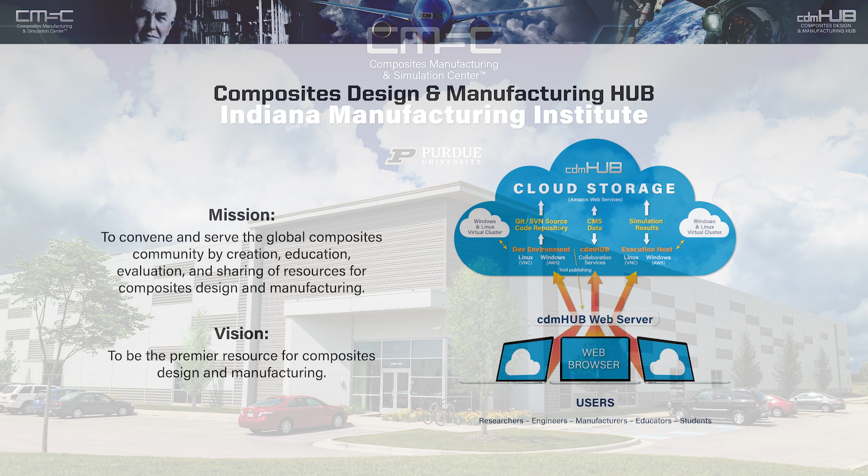We launched the CDM Hub in 2013 with the mission to convene and serve the global composite community by creation, education, evaluation, and sharing of resources for composite design and manufacturing.

CDM Hub provides a very powerful website called cdmhub.org for the composite community to carry out this mission together. We envision CDM Hub to become the premier resource for composite design and manufacturing in the near future.

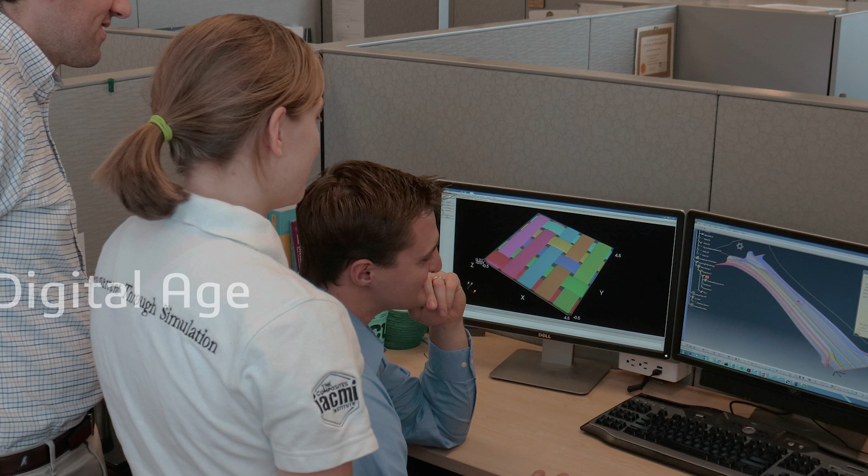The Dassault Systems 3D Experience Education Center of Excellence in Advanced Composites is the result of a 7-year partnership between Purdue University and Dassault Systems. It is expected that this new level of engagement will bring significant benefits to the two partners and to the global society as we work together to bring the advantages of the digital age to society. Together, we will advance the digital enterprise by developing the human talent essential to this new paradigm and by utilizing the 3D Experience platform to exercise digital twins of complex composites manufacturing and performance to demonstrate the power for simulation of phenomena that are understood today only by empirical experiences. We will work together to introduce those concepts to a wide range of industries within the advanced composites community, from the original equipment manufacturers to the supply chain industries.

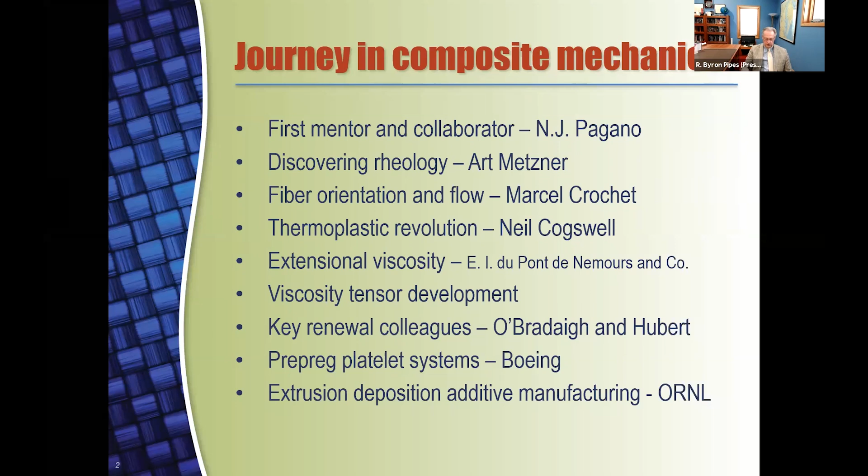The first work in my introduction to composites began quite early. In 1969, I joined a company which is today Lockheed in Fort Worth, Texas, and I was challenged by my boss at that time, Dr. Jim Ashton, to solve this free edge problem that had been discussed because people were depending entirely upon laminated plate theory for much of our early work. It had just recently been developed and adopted to composite materials, and while laminate theory did provide an excellent platform to understand these anisotropic materials, it failed to explain what happened at the free edge.

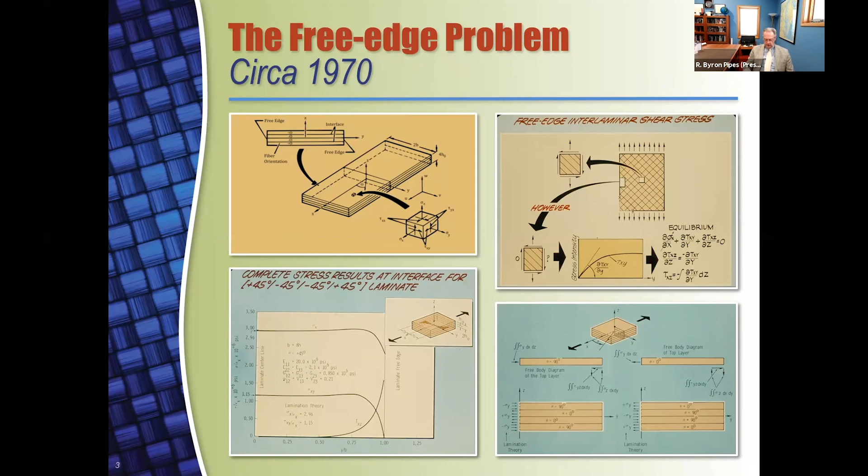This free edge challenge had been offered up by the U.S. Air Force, and there was a gentleman there by the name of Nicholas Pagano, who also was working on this problem, and I was sent to meet him and talk to him at that time. He and I met, we became collaborators, then he became my mentor, and the work that we published together in this area certainly launched my career.

The interesting thing that happened is that Nick continued to follow this problem for another decade and developed the extraordinary understanding that we have today in terms of how stress transfer occurs at a discontinuity such as a free edge. He published much of this work in a book edited by J.N. Reddy, and I recommend it highly to you all. At the very bottom of the page is the first archival article that Nick and I published together. Without Nick, I certainly would not be where I sit today.

This work was continued here at Purdue some years later by Jonathan Goodsell. We had solved only the tension, extensional deformation problem. We had not solved bending, we had not solved thermal expansion, and we had not solved twisting. In many ways, Jonathan put the finishing touches on this work. The complete family of solutions is now available in a publication by Jonathan in 2016.

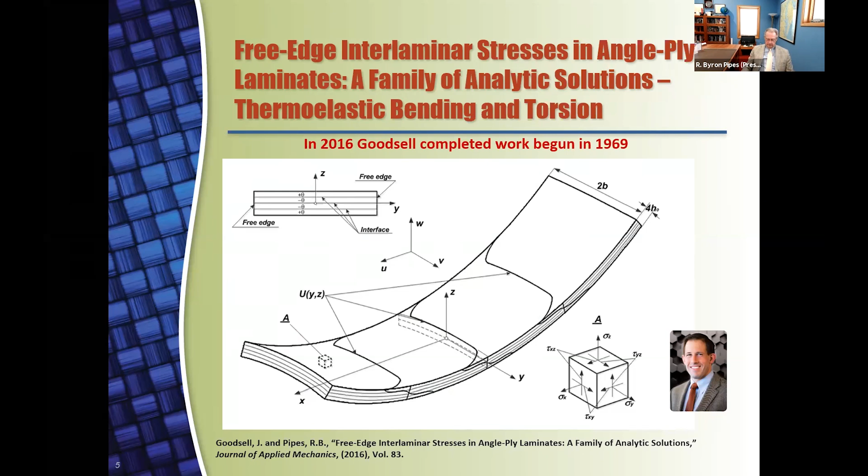The first real mentor I had after I joined the academic world was Arthur B. Metzner. It turns out that Arthur, better known as Art, well known in the field of rheology, was an extraordinary faculty member. He, in many ways, set the example of what the modern faculty member should be, a scholar, yet with one foot in industry, trying to understand what are the issues that are barriers to technology development. Art was a master at this. He also led one of the top-ranked chemical engineering departments in the country at that time at the University of Delaware.

He and I became friends, which was a big surprise to me. In many ways, he chose to be my mentor, and I have to tell you, it was a wonderful lucky break for me. As I looked at his career and modeled my own after it, to be fair, I found a few things that I thought were particularly important.

It's his view of collaborators and mentors, quoted here on this slide. I'm going to read it to you because I want you to think about it. 'There were very few associates over the years, both in academia and industry, who were not important mentors to me. And as the years went by, older mentors were replaced by equally important younger associates. The young mentors in the last decade of my career were no less important than the older people in the first.' I must say that this has also happened to me in a very interesting way.

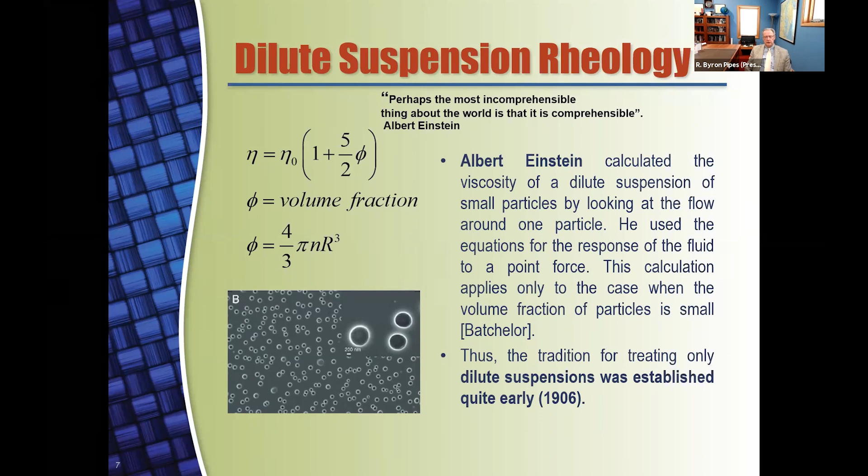Art introduced me to dilute suspension rheology, which was in fact the dominant subject of that time. There were all kinds of issues about what happens to a liquid when you put particles inside it, whether they be spherical particles or ellipsoidal particles, namely fibers, or not. As you look at the history of this subject, you realize that one of our notable scientists, Albert Einstein, actually wrote the first equation on measuring viscosity, or predicting viscosity, from the viscosity of the polymer and the sphere volume fraction. You can see the equation given. Einstein established the base of dilute suspension rheology of that time, which propagated itself for another 100 years or more, because much of the work done in suspension rheology is dilute, and there are some good reasons for that.

Now, as we began to look at fiber systems, and I was particularly interested in fiber composites, the particles that are involved in a liquid polymer during the state in which the forming is taking place, namely the molding steps, requires that there be an understanding between the fiber orientation and the fluid mechanics, or the fluid flow characteristics.

Perhaps the most classic piece of work that everyone has used since this first started is Jeffery's solution. Jeffery wrote a set of equations for an isolated fiber in a fluid flow, and he predicted the rotational characteristics of that fiber, that is to say, the rotation rate. You can see Jeffery's equation here, expressed in terms of the deformation rate tensor, in this case planar. I've tried to make it simple for you, including the vorticity. Each of these terms describes the fluid dynamics in which the fiber finds itself.

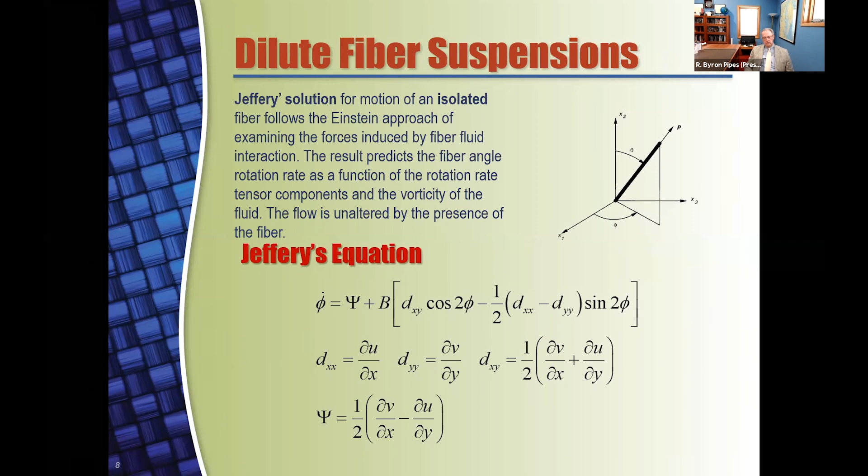And the fiber is reacting to forces, the hydrodynamic forces in the case of water, which cause the motion of the fiber. This is the beginning point of all the work that we have today in fiber orientation and flow, and the prediction of final fiber orientation in a molding simulation.

Marcel came, he met with me and talked. We became good friends and colleagues at that time. It's interesting, just as a side note, to tell you that Marcel became the rector of the Catholic University in Louvain, in Belgium, and so he went on into the upper administration of the university. So he was a man of many talents.

At any rate, I had a student at the time by the name of Richard Givler, and we were struggling with the idea of how do we take this fiber orientation model and integrate it into a fluid mechanics system in which the geometry could be arbitrary. Well, finite element methods give you the ideal method to do that. And indeed, Marcel worked with my student. I even sent Givler to Belgium for 6 months, and we published this work in 1983.

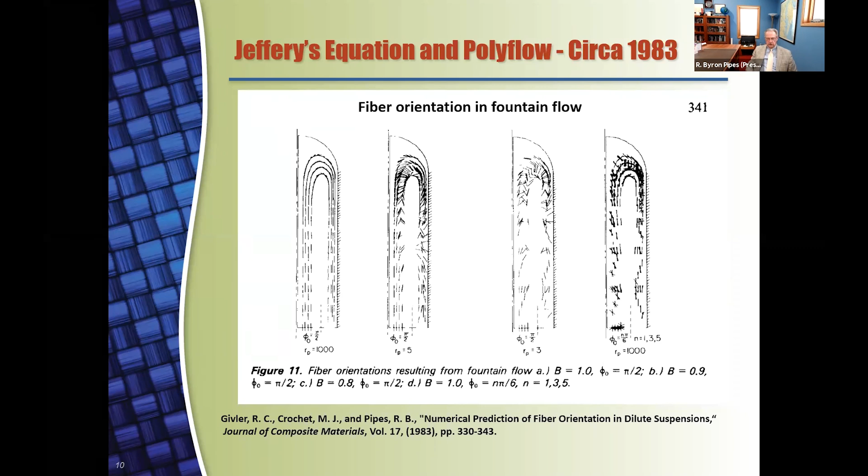Now I turn to the period in which I discovered thermoplastic polymers. I had worked for many years, as you know, in thermosets. Coming out of the conventional aerospace industry, it was an entirely thermoset composites technology. It was not thermoplastic. There were a lot of reasons why it wasn't, and I don't have time to go into them in great detail.

But in 1981, things began to change, and a company by the name of ICI in England, ICI PLC, which at one time referred to Imperial Chemical Industries, was advancing the idea that a thermoplastic polymer, polyether-ether ketone, could be an answer to aerospace composites applications.

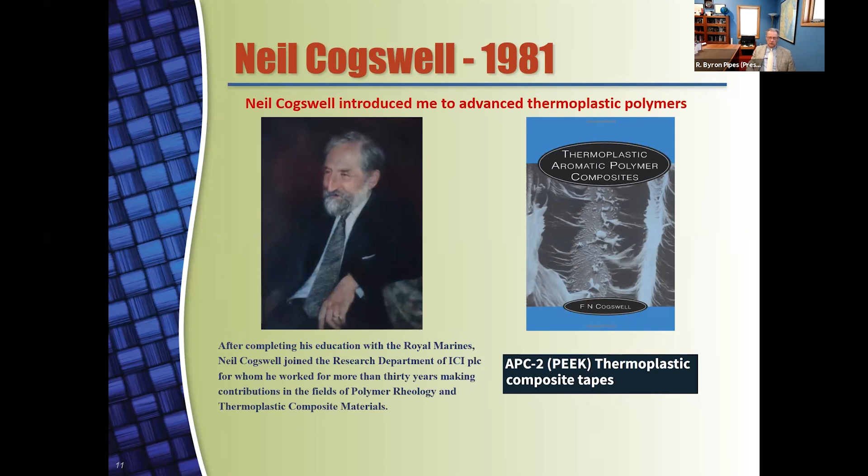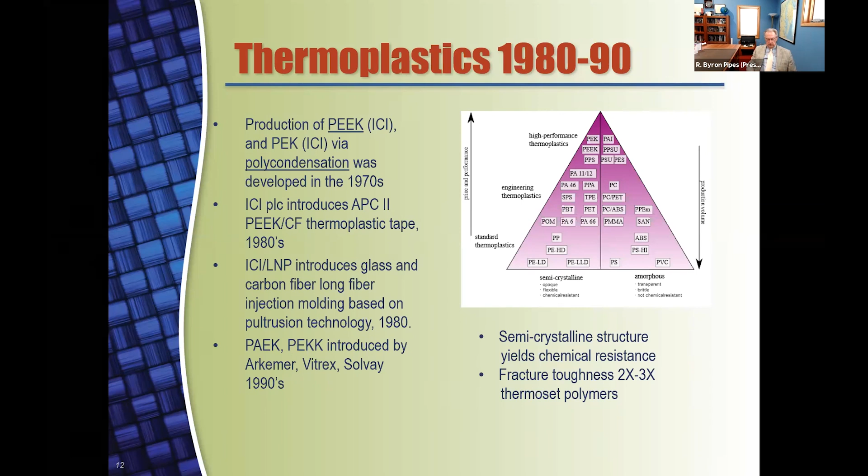These thermoplastic polymers have emerged as materials of quite substantial interest to us in the future because unlike thermosets in conventional aerospace applications, their cycle times are measured in minutes, whereas thermoset cycle times are measured in hours. So we can anticipate large increases in rate of production of these materials, and that's one of the primary objectives here. People also tout their ability to be recycled, and that's another subject we could spend some time on, but I will not today.

While I was at the University of Delaware, there was a small company nearby by the name of E.I. DuPont de Nemours—not small at that time, a major company. I encountered a few engineers there, and they asked me if I could help them work with stretch forming of composites. I said, fibers don't stretch, it doesn't make any sense to try to stretch this material. Oh, they said, we have stretch broken fibers. And I said, I don't understand what that is. Well, we have a machine that in the early days of polyester fibers, we would put them through this machine.

It would stretch break them in such a way that the feel of the polyester synthetic fiber had the feel of wool or cotton. That's what we were looking for in those days. Well, the machine works carbon fiber, so we stretch broke carbon fiber, impregnated it, and lo and behold, you can indeed form it. You can see at the lower right a straight channel which has been stretch formed into a curved one. So it did work.

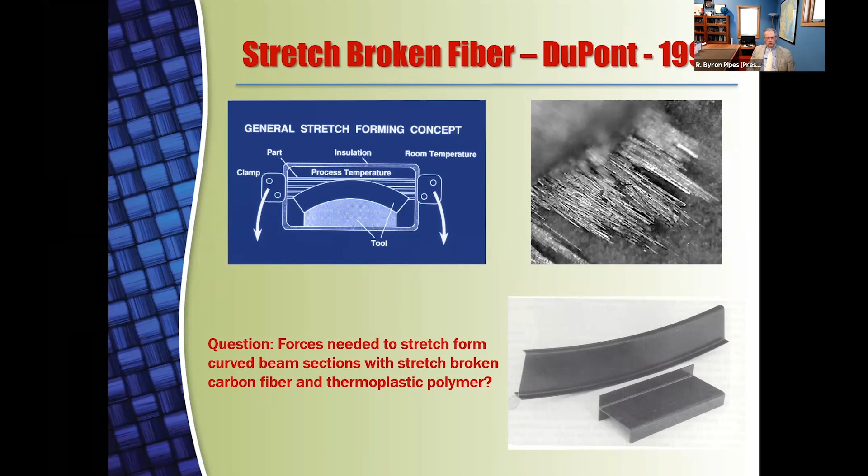The question to me that they were asking: can we anticipate, can we predict the forces necessary to carry out this stretch broken forming or stretch forming? I had to think about this for a while. It was not a subject I had worked in before, but clearly they were talking about a stretch broken carbon yarn which was in the presence of a liquid polymer because they were at the melt temperature. So the question then was, could you anticipate what that property would be? Well, obviously it would be a viscosity. And so I began to look at that problem by formulating it very much as we had formulated the unidirectional continuous fiber system.

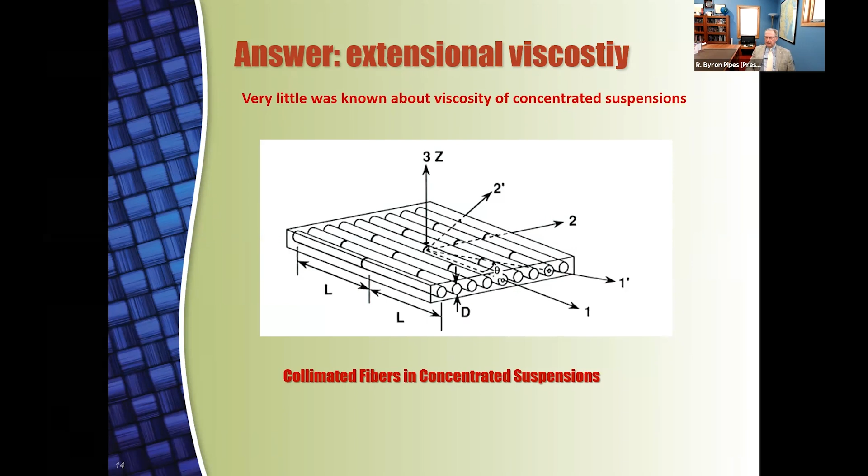But here we had to think seriously about concentrated suspensions. We had fiber volume fractions that were 60%. Typically, dilute concentrations were down in the range of 5% or lower. And indeed, no one had worked at the level of 60% volume fraction in these suspensions before. So it presented an interesting idea, but a nice challenge. And of course, a typical engineer with a challenge simply looks at the kinetics or the kinematics or some mechanistic idea from which you can derive the response.

In my case, I looked at these broken fibers of length L and diameter D, which were separated and moving at relative velocities, shown on the right. The shearing stress in the liquid surrounding the fibers is pretty straightforward. It comes out of that observation and the arrangement of the fibers. We do have to assume things like square, hexagonal, or rectangular array in the system, which of course are not true in the actual case, but they are true enough to identify the mechanisms of stress transfer.

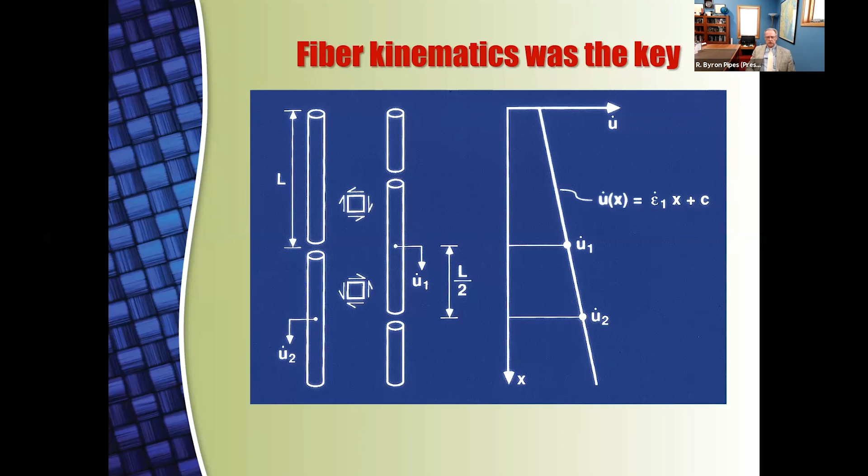So you can write the strain rate of the polymer as a function of the extensional strain rate of the composite in terms of the fiber spacing and diameter. The fiber spacing is S, their diameter D, and a term kappa, which relates to the fiber volume fraction.

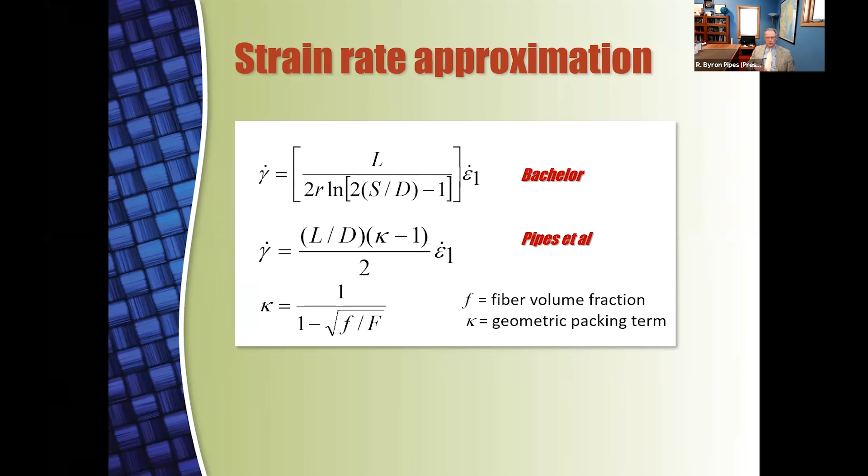There were two of us who had worked on this, and Batchelor had done it too. A very famous fluid mechanician had actually studied this in the 70s. I was unaware of his work and didn't discover it until after I'd finished our own. It turns out the two solutions were very similar. They produced viscosity predictions both depending on the length to diameter squared, meaning if you have a length to diameter of 10, it scales your viscosity at 100. If it's 100, you can do the multiplication yourself—it goes substantially higher. Typically we have long aspect ratio fibers.

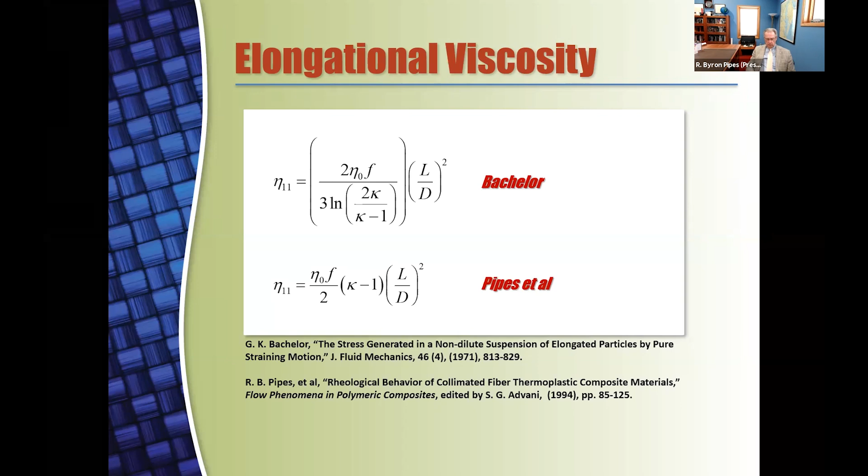We have aspect ratios of at least 1,000 if they're going to do good, efficient load transfer. So it became very clear that this viscosity term was predictable, but that it was going to be quite large. The two publications I call out are the one Batchelor did and our own, summarized in a book edited by Advani. I'll mention Advani again in a moment.

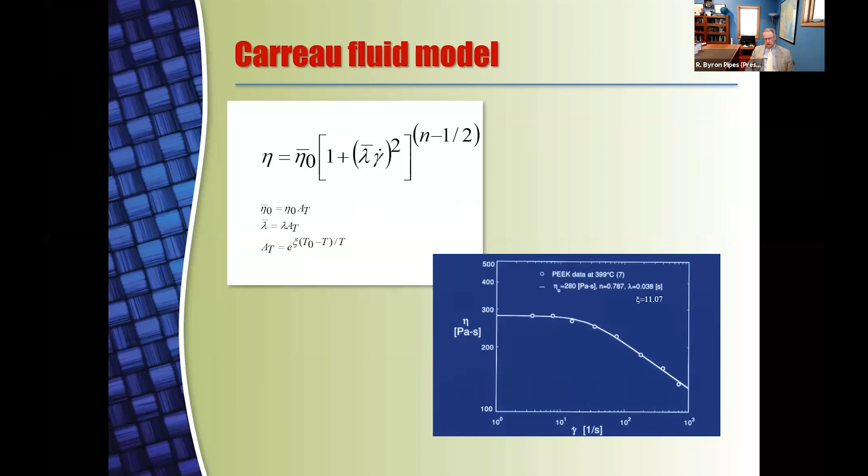These fluids that we work with, when we put particles in them, are no longer Newtonian fluids. They exhibit shear thinning characteristics and temperature dependence, of course, which they had long before they were suspensions. You can take this model with Carreau and represent all of that—the shear thinning, the temperature dependence, and the recovery of the Newtonian viscosity at zero shear rate.

If you do that, you can predict all of the anisotropic viscosities for such a liquid containing collimated discontinuous fibers of length L and diameter D. The relationships are complex, but they are in fact analytic solutions to these properties, giving us two extensional viscosities and two shearing viscosities developed earlier, with the idea that eta 2,2 and eta 3,3 were the same, and that 1,3 and 1,2 were the same. So there are actually three elongational viscosities and three shearing viscosities for such a fluid.

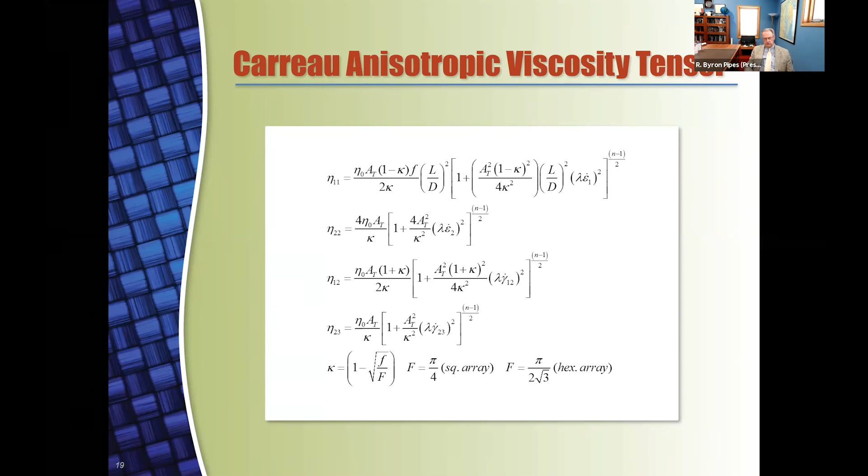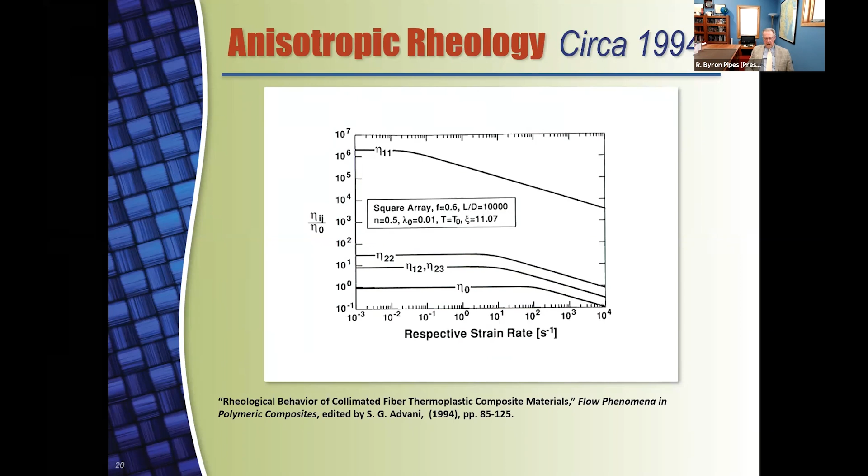If you take those equations and plot them, this happens to be for a specific polymer with a length to diameter ratio of 10,000. You'll note that eta 1,1, the viscosity in the elongational direction, is measured at the 10 to the 6th level, whereas the shearing viscosities are 10 to the 1st. The second elongational viscosity is a bit larger, but not much. So all of the other viscosities are relatively near that of the polymer, but the extensional viscosity gives some really interesting challenges in modeling flow with this class of materials—what we are now calling hyper-concentrated systems.

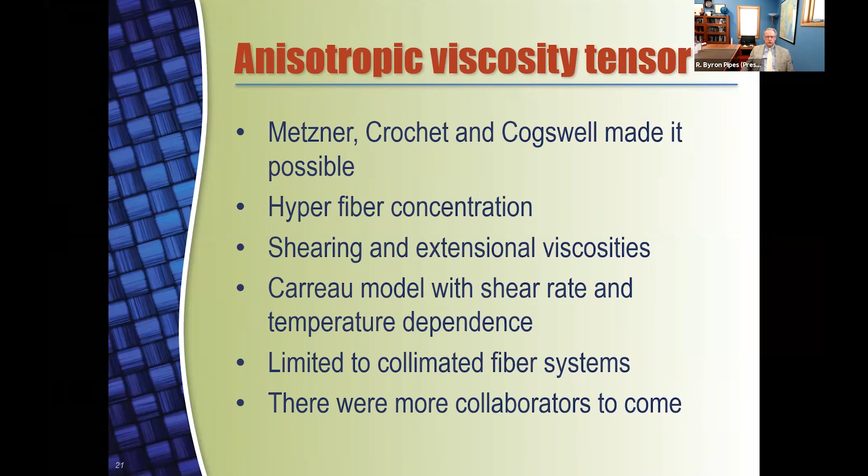Let me take a moment and say, how did this all happen? Well, were it not for Metzner, Crochet, and Cogswell, it wouldn't have happened. But it did, and it allows us to consider hyper-fiber concentration, to predict all of the viscosity—shearing and extensional—and gives us the shear rate characteristics and dependence on temperature. However, it's limited to collimated fiber systems, and so there needed to be more to come on this subject. By the way, this was generally completed in the decade of the 90s.

Let me stop now and take a small detour to point out two other colleagues who became renewing colleagues. Some of you know I spent some years in the administrative world, and when I returned, I found these young colleagues ready and able to work again with me, as I call it, at the bench.

Conchúr Ó Brádaigh, whom you heard from on this lecture series, the Global Composites Expert Lecture Series, on January 21st. His thesis was published in 1990. It's still the record, 425 pages, the largest doctoral dissertation published in my group. But Connor's gone on to be head of engineering at the University of Edinburgh, roughly equivalent to our deanships here in America. What an extraordinary foundation he laid in the area of forming, something we worked together on in the 1990s.

After I returned from the presidency, I joined NASA Langley Research Center, and a young man arrived there with his wife. Both were on NRC fellowship, having come from Canada, from the University of British Columbia. Both were students of Anoush Poursartip. Anoush is an old friend now, but I actually never met Anoush at that time. I met him through Pascal, and I learned all of the extraordinary things Anoush has done in composites manufacturing and thermosets. I must say they are my teachers in this field as I moved to composites manufacturing.

Pascal Hubert became my colleague and my teacher in this area. Today he is a distinguished professor of mechanical engineering at McGill University, and it has been a wonderful relationship for many years.

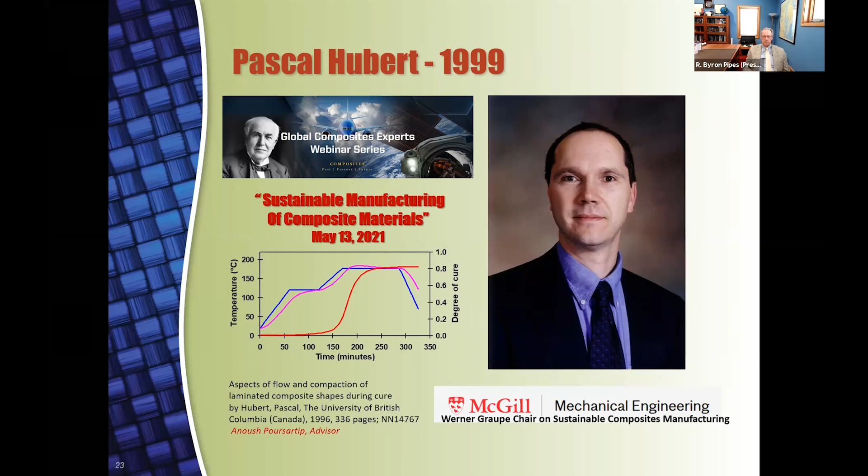The first area I want to discuss, though not the first they worked in, is one Boeing supported us in for some time, where I think these students made very significant contributions: platelet molding materials. Here we take thermoplastic prepreg, cut it into pieces we call platelets, and then mold them into shape to make complex shapes. This gives a high fiber concentration, moldable material that cannot be made any other way. We can have fiber volume fractions of 60%.

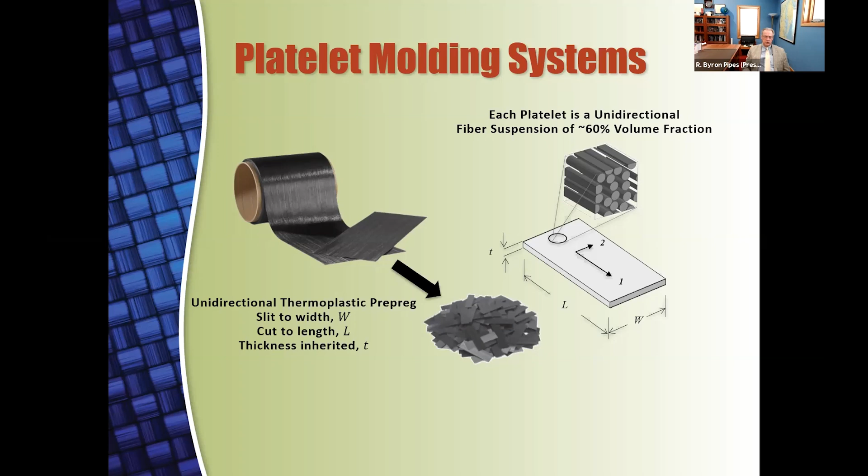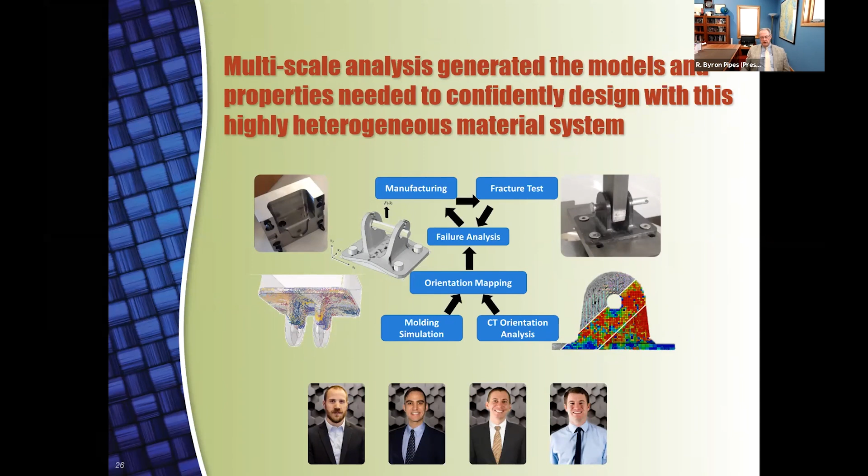The team that came together - Tony Favaloro, Drew Sommer, Sergey Kravchenko, and Ben Denos - formed a team, each with a piece of this problem. We're asking: can we make a very complex shape? Can we predict the microstructure from the forming? Can we take the microstructure, measure it, and then simulate that microstructure to predict its behavior in terms of performance?

The first question was, can we use the classic fiber orientation modeling available by that time? I had started some of this work in the 80s, along with some really fine people - Chuck Tucker, Phan-Thien, Suresh Advani, Tim Osswald. Over a several decade period they developed this methodology, primarily for injection molding, using Jeffery's equation. But as I said, Jeffery's equation has the problem that fibers tumble, and we know they do not tumble. So a diffusion term was introduced.

That diffusion term stopped the rotational behavior, as if we're accounting for interaction with other fibers. It gave us slowed kinetics. The closure approximation was used to predict the fourth order tensor from a second order orientation tensor, and we've adopted a second order orientation tensor as a basis of this work. However, while it's good for fluid mechanics, it's not as good for our solid mechanics field, where we need the fourth order tensor to predict some of our mechanical properties.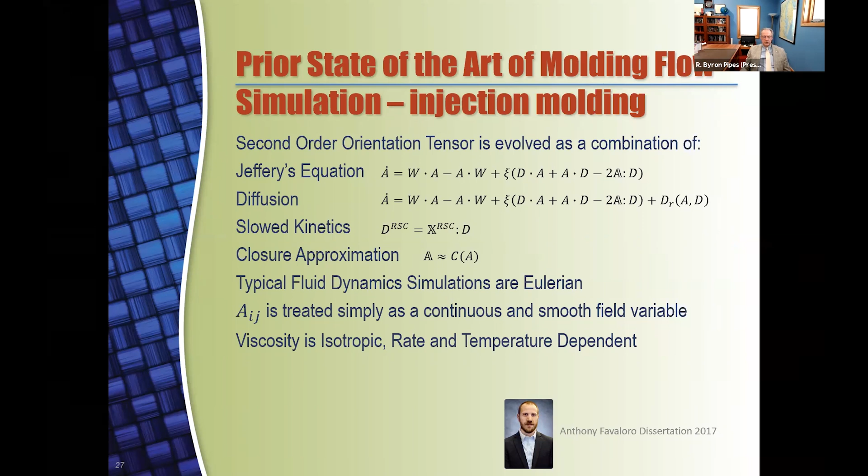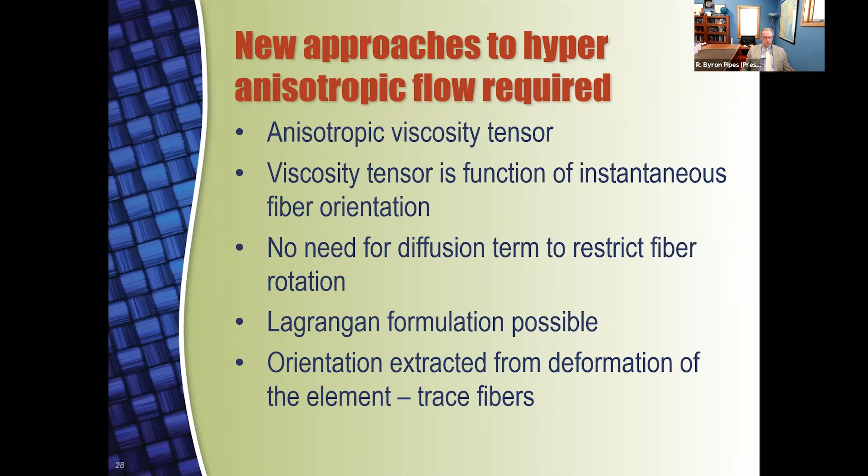So what happened was that we needed and we provided a new approach, something with an anisotropic viscosity tensor, where the viscosity itself was a function of the instantaneous fiber orientation, where there was no need for this diffusion term to restrict fiber rotation, where a Lagrangian formulation was possible, and we could extract the orientation from the deformation of the element and trace fibers.

So here's the nuts and bolts, if you will. We describe the orientation of the fiber in the same way that it's always been done, but we then map out trace fibers. We develop a constitutive relationship which is truly anisotropic, and you can see the tensor for viscosity and shear rate, and of course the pressure term.

We have the ability to do orientation updating as a function of the deformation gradients. No fiber tumbling happens. More than that, we can incorporate the anisotropy of the fiber system, as is shown here in the lower right. This is the work of Anthony Favaloro, and his PhD topic was published in 2017.

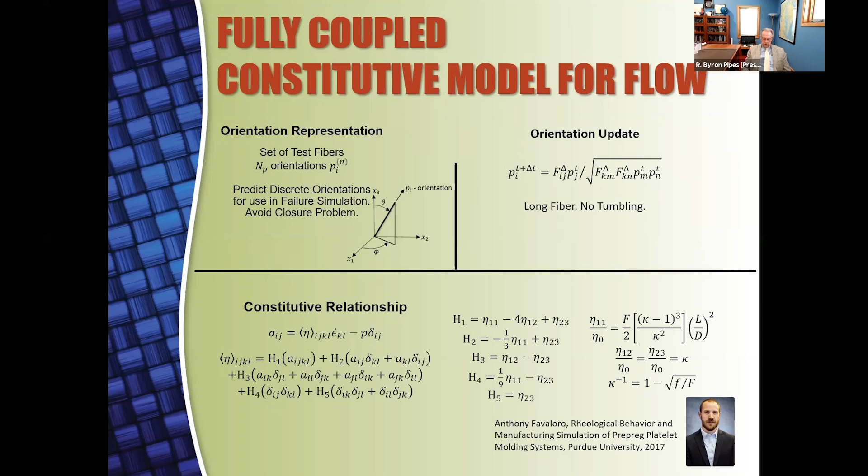I go on to talk a little more detail about the viscous compliance and the viscous stiffness matrices expanded in this form. This gives us three independent constants: extensional viscosity and two shearing viscosities, and we do volume averaging over orientation state.

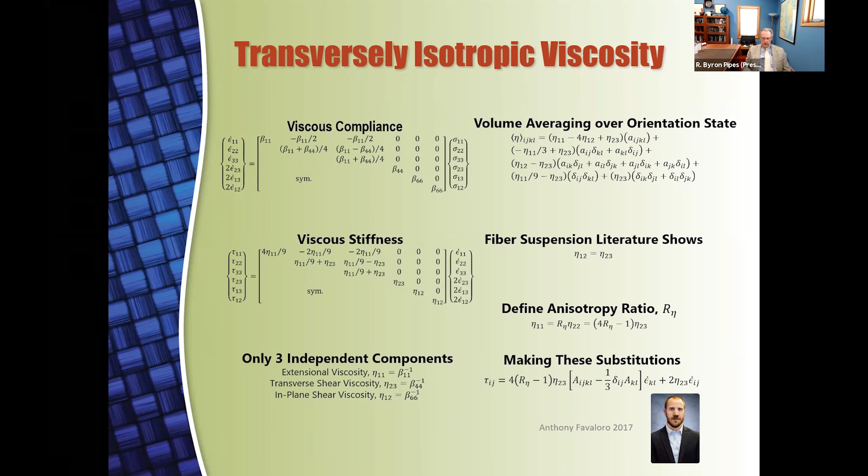We get the form that you see there. In our work, we've proven that eta 1,2 and 2,3 were equivalent, so you can see the reduced constitutive relationship in the lower right, in which we have the fourth order orientation tensor, and really only one viscosity term remains.

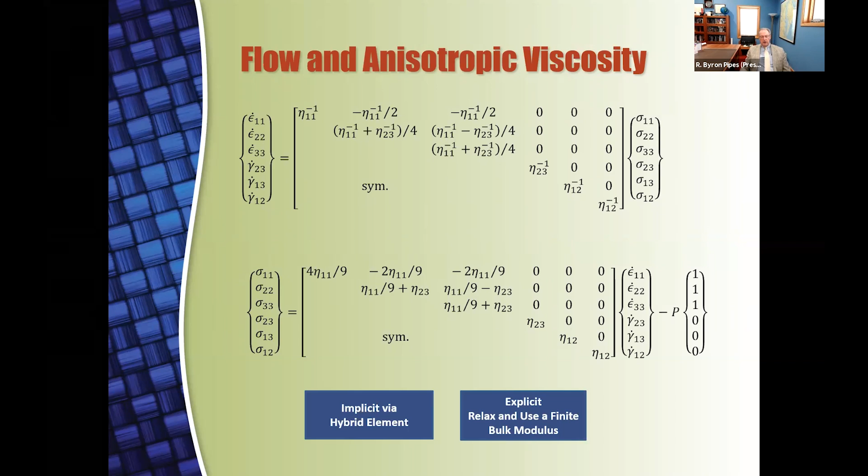The flow in this, using anisotropic viscosity, must also deal with incompressibility. And there are two options here: either the implicit methodology with a hybrid element, or the explicit methodology where we use relaxation and a finite bulk modulus. Both approaches are possible.

Now, the first thing that happens in these platelet systems is we have to take them individually and consolidate them into a consolidated state.

This is the work of Drew Sommer, a PhD student who just finished with us in 2018, is now at Oxford University in a postdoc. We looked at taking these platelets into a random state, consolidating them, and once consolidated, that becomes the preform for molding.

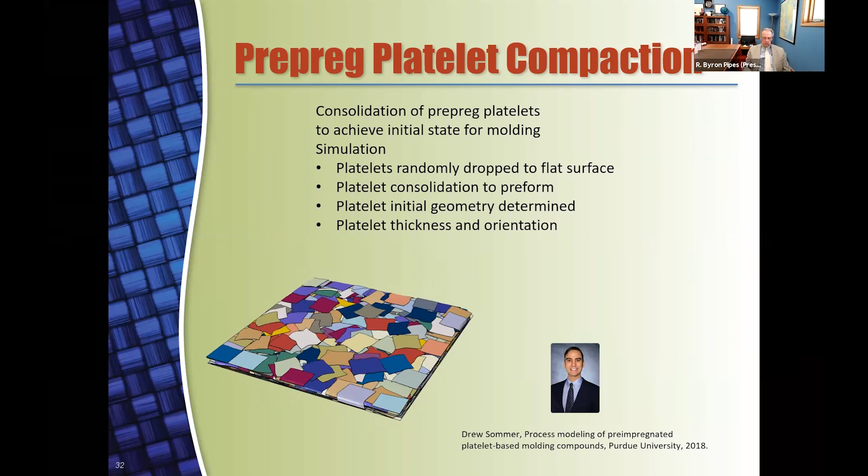The interesting thing is that this has always been an initial value problem, and if you don't get the orientation state and all of the geometric issues correct at the beginning, you can't possibly predict what comes next. In Drew's work, we showed that as the consolidation process takes place, not only does orientation state itself change...

But also the thickness of the platelet can change as much as 40% in some of the packing geometries, in some regions of the preform.

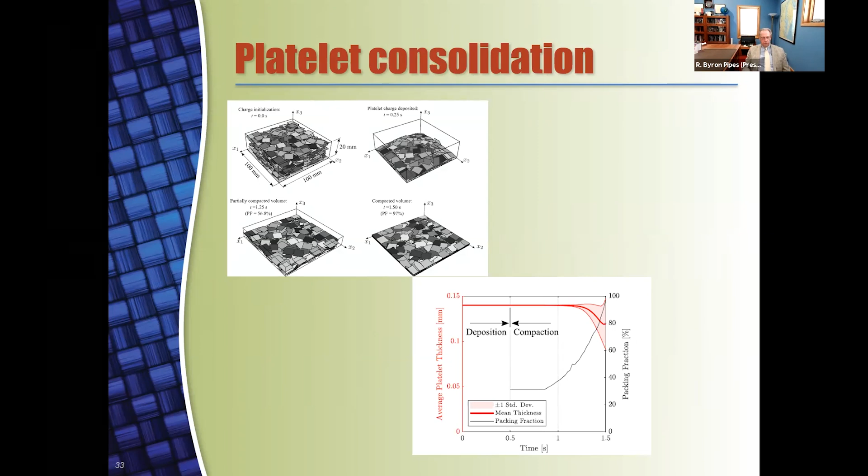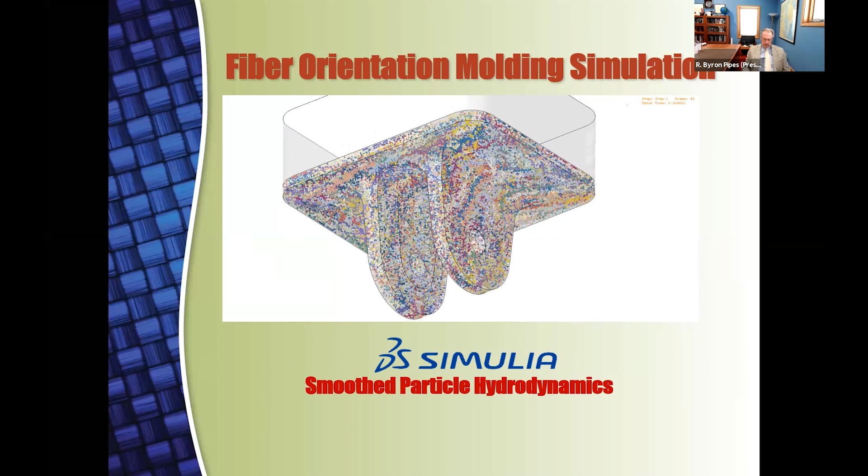Next, this orientation state is mapped into the solid model for the performance characteristics. The question is, how well are these predictions working? And to do that, the next student worked on...

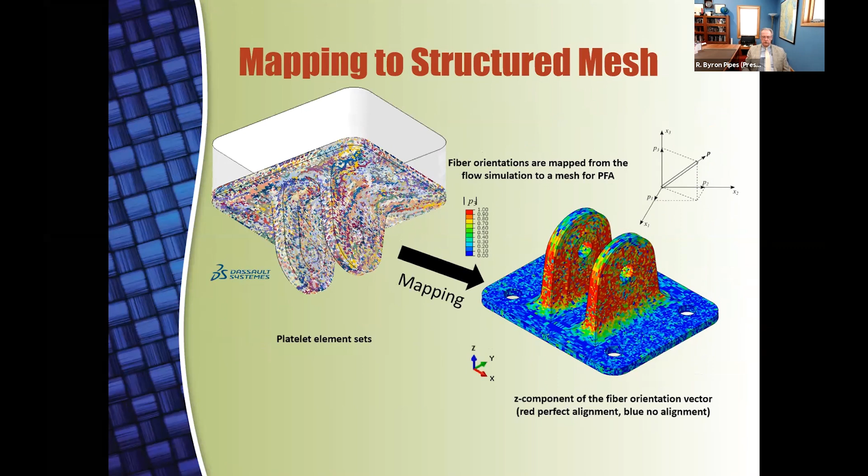Computer aided tomography analysis, and what you see here is a molding simulation on the left and a CAT scan on the right. It's not a simple process to do a CAT scan and still preserve the large scale dimensions in the system. And Ben was able to do that with a very interesting density gradient methodology that he applied in his doctoral dissertation of 2017.

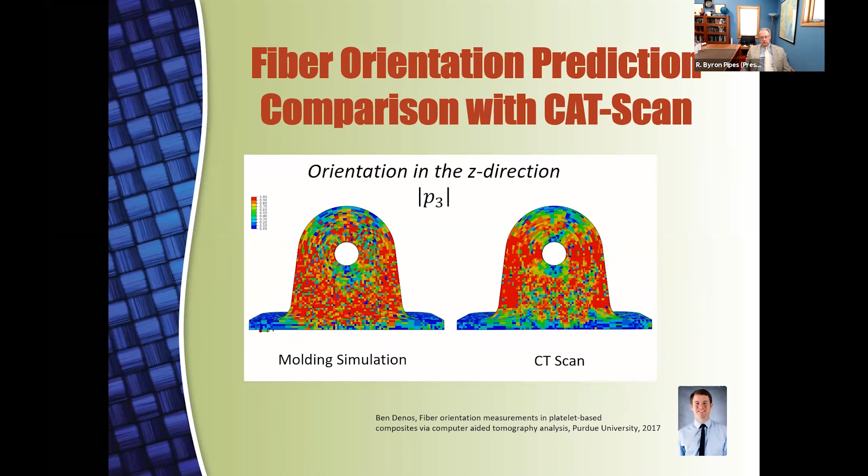I think you would agree that the molding simulation and the CAT scan results show very good comparison.

The question next is, can you take that orientation data and that geometric data of the microstructure and use it to predict the performance of the molded product? This is, of course, where we're going, because we want to make products faster. We want to replace aluminum and other metals in aircraft with these products. And by the way, they are flying today in the 787.

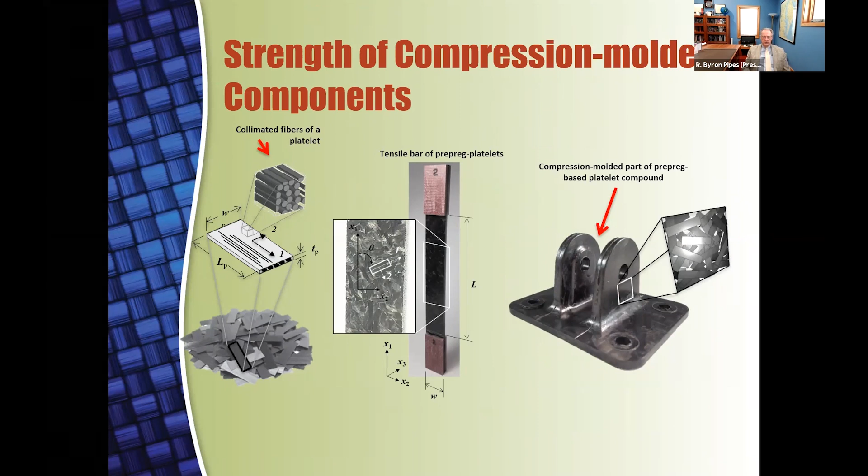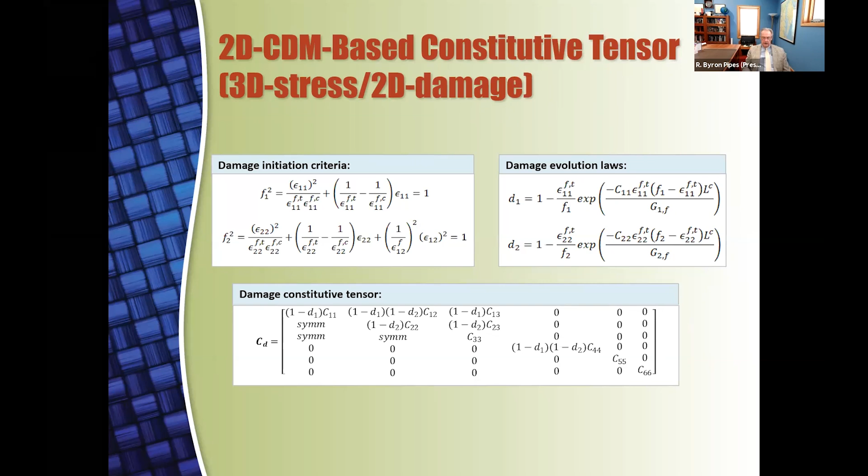We start with damage mechanics, and I won't go through the details here. If you're familiar with the methodology, you'll recognize it, and if you're not, I suggest you go read about it. It's a very interesting subject.

Let us understand that if we take a simple coupon of this material, there's large-scale heterogeneity with respect to the platelets and their orientation state. On the left, we have the 3D image of a scanned coupon. On the right, we have the orientation in that coupon. Let's see if we can predict its behavior.

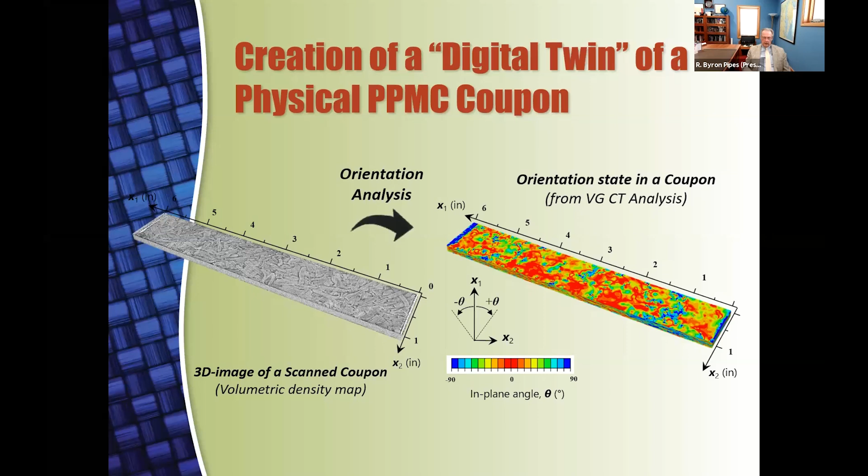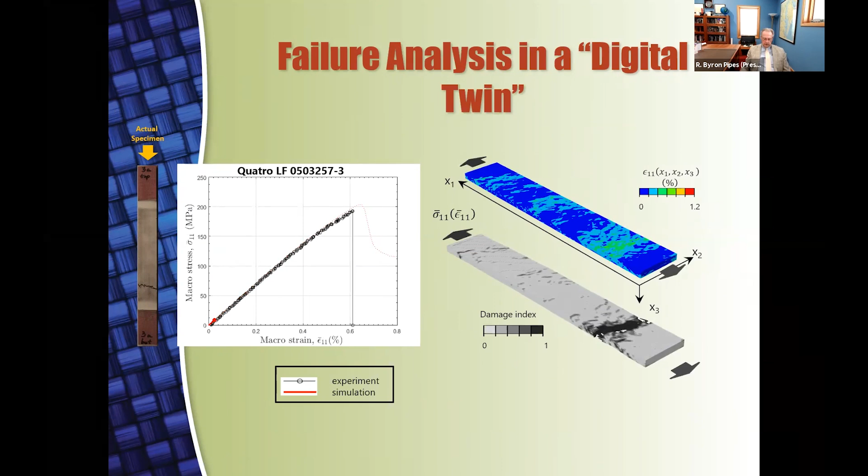Here's the simulation, and on the far right is the actual sample, far left is the actual sample. You can see where it was broken. On the right, you begin to see the damage index, and you begin to see the fracture pattern developing. It is, in fact, at the same location and in the same character as the observed physical experiment.

Once we had completed that, we knew we had something very special. We now have the ability to predict from the microstructure all of the performance characteristics of a virtual laboratory, meaning you can carry out the ASTM standards in an entirely virtual environment.

This is the work of Sergei Kravchenko. Sergei graduated in 2017 and stayed with us and worked for a few years. He's currently in England at Bristol on a postdoc, and he will take a faculty position at the University of British Columbia with Professor Poursartip in the fall. We're very proud of him and his work.

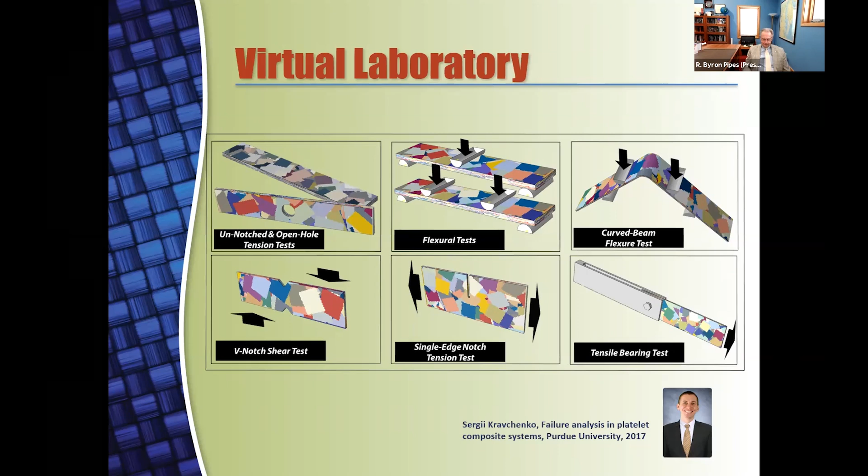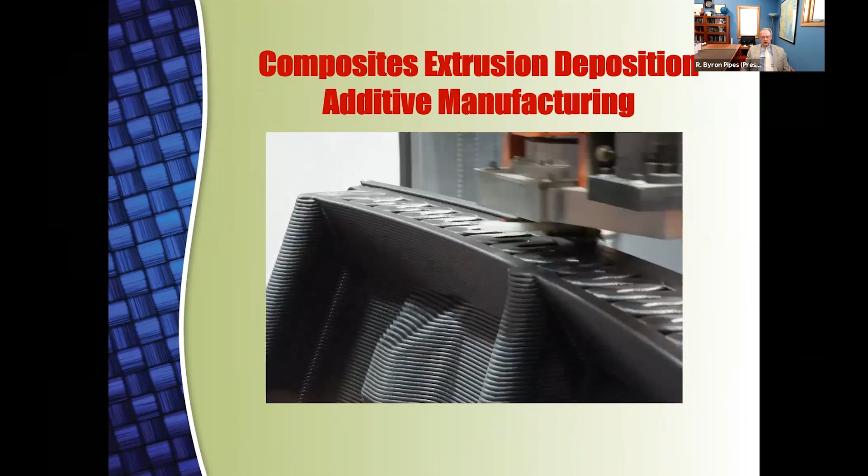I now want to turn to 3D printing. It was announced in my introduction that I've been working in this area, and this really was initiated by work at Oak Ridge National Laboratory and their invention there of this technology. And it's come an awful long way since 2015. We can make very large scale parts.

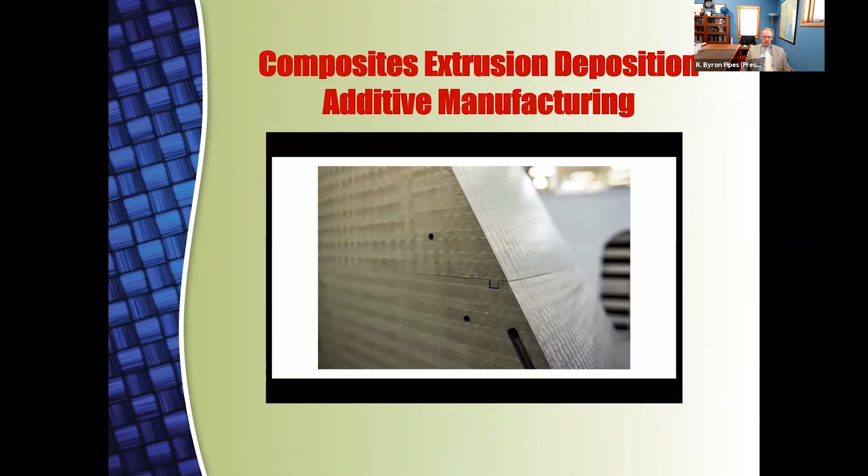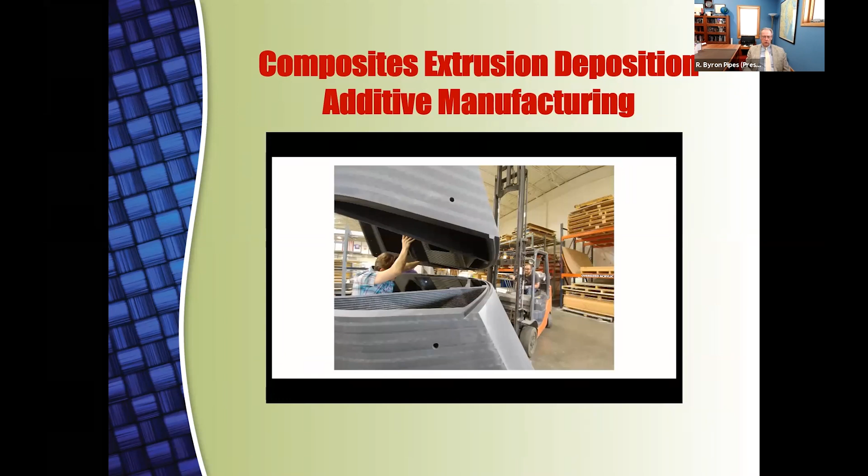The printing is a step followed by a machining step. If you've been to Las Vegas recently and seen the Las Vegas football stadium, in there is a 85-foot tower, the torch tower, which is made by this method, by this machine, which is a Thermwood large-scale additive manufacturing machine.

This work here at Purdue is to produce the digital twin of this extrusion deposition additive manufacturing. It involves an awful lot of rheological phenomena of fiber-filled systems because we're printing thermoplastic polymers that contain short carbon fibers, and we're printing them at concentrations up to 50% by volume.

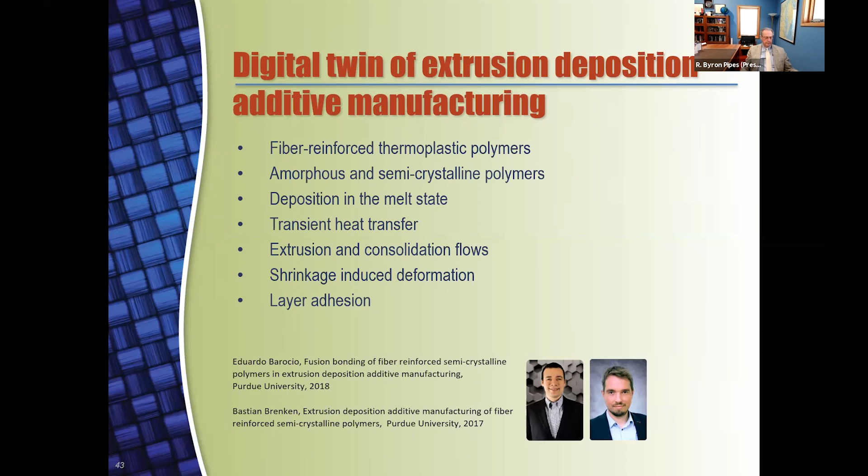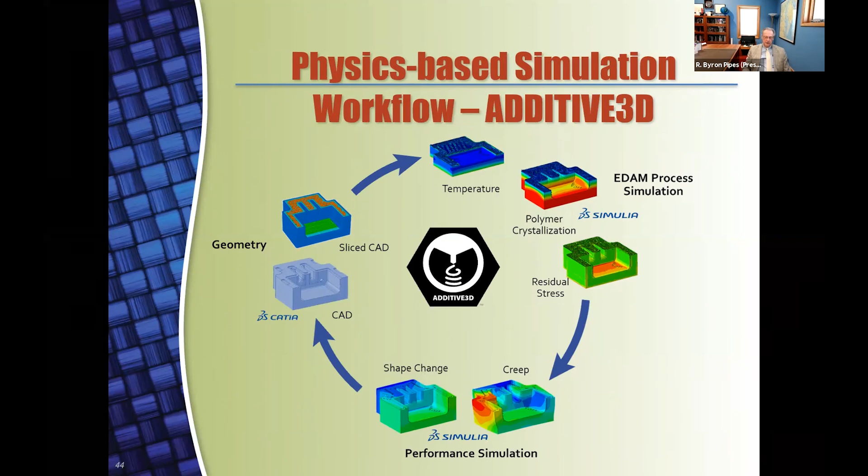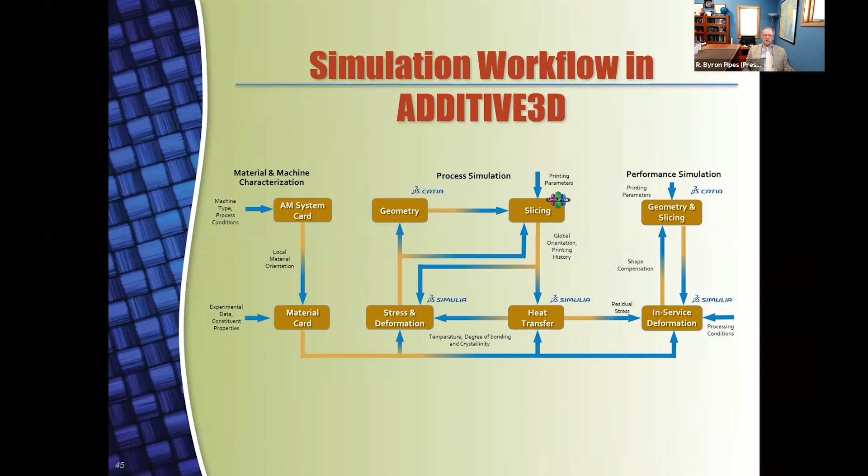That tells me I need to finish. Anyway, let me quickly say that the physics-based simulation workflow is called Additive3D. It involves all of the various steps from residual stress to creep to shape change. This technology is in our workflow here with material cards and machine cards, geometry, stress and deformation, heat transfer, polymer physics, the whole simulation. And as you can see, it involves the classic steps.

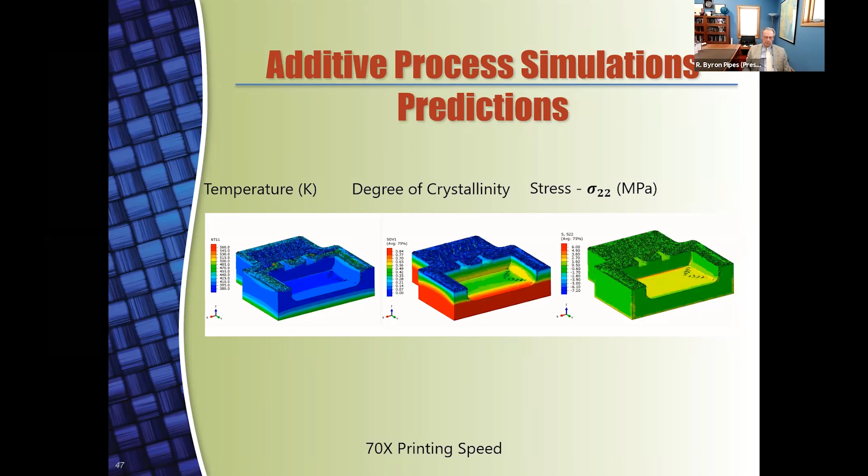I'll finish with just one demonstration to show you that the simulation produces the temperature during the manufacturing process, the degree of crystallinity, and the residual stresses that are built into the part as it is produced. A very exciting and interesting set of research, and the team members, Eduardo Barocio and Bastian Brenken, with their two doctoral degrees from here, are the base of this work.

Let me conclude by saying that my summary would be that mentors and collaborators have been very key to me and to my work, and I think it's true for all of us. It's also true that if one focuses and continues to focus in a thematic area, more progress is made. And indeed, we've seen really improved results with time and technological developments, not the least of which is the computing technology in the finite element area. Understanding of these problems comes from commitment.

And if you think about the impact of your work, your impact comes from all of the things above. Thank you very much for listening today. I'm delighted to have spent this time with you, and I look forward to your questions.